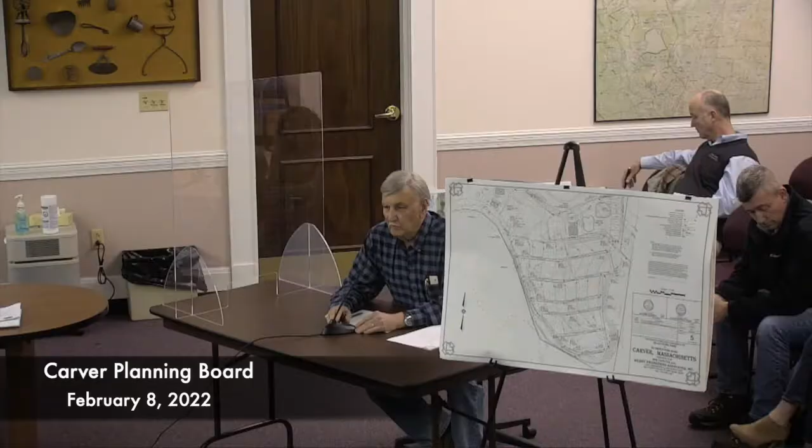Well, we did a couple of new sheets. First of all, I'm Dick De Benedictis from Plymouth, Mass, working with Webby Engineering and Northgate Resorts, trying to get this Jellystone Park improvements completed. The plan you see now has 3 sheets, having to do with the hydrants that we added. We promised we would add hydrants, so we've added, I believe, 11 — 5 in one area, 6 in another. Also, we have a detail sheet showing the hydrants.

So Andy hasn't seen these except on the internet, probably today when I sent it to him. And we also have the water gates, or water shutoffs, that we talked about in the last hearing on those 3 sheets. So those are in addition to the sheets on the other side of this board here. Let's see what Tom can do over here.

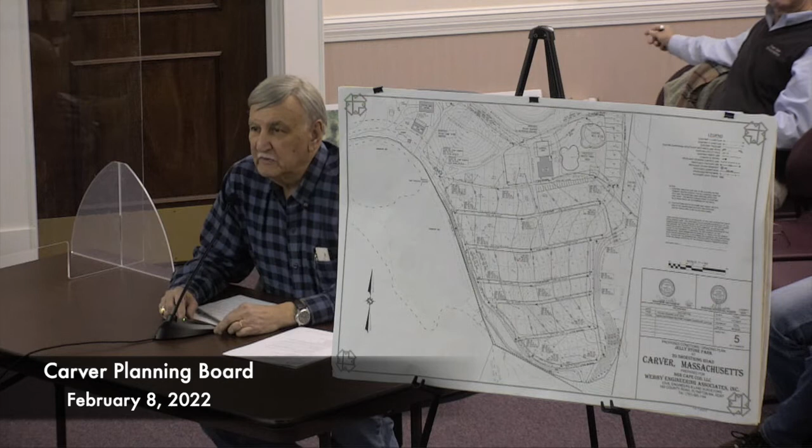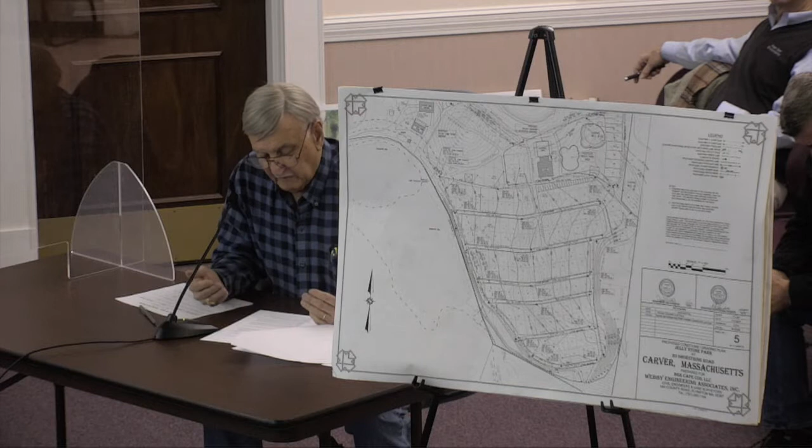I also took some time today to respond to a lot of the comments that Andy made the other day, and just go over them. I've sent them as email to, I believe, Tom, Andrew, and Bruce, but I didn't have the other emails. I do have hard copies here if anybody wants to look at them — only 3, but we can go over them if you'd like. Basically, a number of these are comments Andrew made that we totally agree with, and we've talked about them over the last few weeks.

So if I may, we made copies of your responses for the board. Oh, you did? We also scanned them and put them on the screen. Okay, we've advanced some since Kingston, huh? They have electricity here.

Tom and I have been involved for many years when we were both in Kingston on major projects. This is your one chance to tell people they made a terrible mistake leaving them in the building, but after that, you've got to just work with me, okay?

Well, it's really up to the board. Would we like to go over Andrew's comments? I have my copy here, I don't know if you have a copy, and we can go off the screen that Tom has over there.

The first page is just the number of items we've provided to the board, so they're not really comments as such. The second page deals with the zoning bylaws. The first item was definitions, and it says the existing and proposed project site meets the definition of commercial recreational campground with components of a commercial recreation outdoors use.

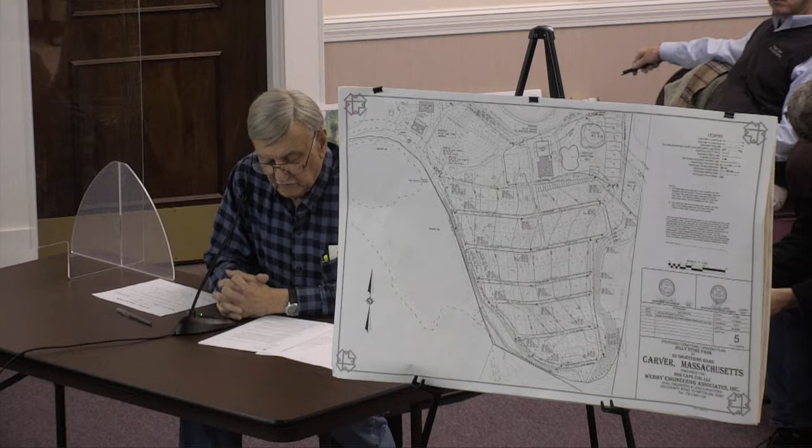As far as the principal use, it's a recreational campground, and it's permitted under the planning board under section 5300. It should be noted that commercial recreational campground is an existing use, and the proposed campsite expansion, building construction, and additions are consistent with the existing use.

Everybody in this room knows it was Shady Acres for some 40 years, and this is just an upgrade of a campground that was well known and well liked. It had septic systems and wells that didn't necessarily meet all of today's regulations, but they performed well for years. We're going to be adding 3 to 5 new wells of low yield, but they'll provide a definite centralized water system. So we agree - I put agreed, but it's basically obvious.

We were asked to provide some elevations of the proposed buildings, and I believe the client was represented by Mr. Rob Kraus, sitting behind me here. I believe they provided some, maybe all - were they all provided? Yes, I believe they were all provided. And provide the zoning table from the zoning bylaws - well, I'm not sure whether we put that into our engineering report or not.

The planning board, next section 2330, shall include findings for the section within the decision letter. Andrew says Fuss and O'Neill does not have any concerns with the building placement in regards to causing danger from fire. However, Fuss and O'Neill defers to the building official to make a final determination, and we agree with that. Fuss and O'Neill does not have any concerns with the emergency access, but defers to the fire department, which would be proper, and we agree.

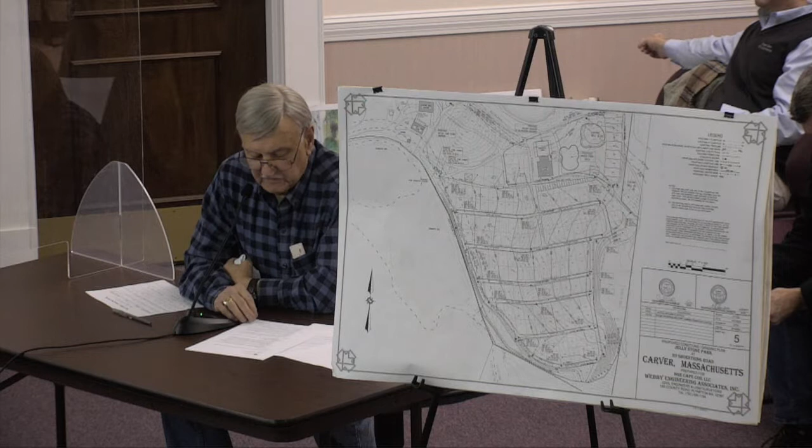We're increasing the power input into the park to 3-phase from what is now 1-phase, and all the sites will have at least a 50 amp basis. They'll be feeding each campsite with panels, so someone using a campsite will have an actual panel to hook into, just like for water and sewer. That's the key to the whole thing—this is not going to be haphazard, where you have to go find the electric, water, sewer, or a dump site. There's going to be a sewerage system that goes to a wastewater treatment plant, which will be very sophisticated.

So the utility poles will be something we'll have to work out once we get the final engineering between the electric company and Eversource.

We had an original item in the bylaws about measuring every 10-inch caliper tree or better, but that isn't really the mode of how we're operating. We're basically planting a lot of trees, since we've cleared out the minor trees and tried to flatten out the site so we don't have erosion on the roadways. So that's already in the plan.

I should say, if you want to stop me on anything here and ask me a question, please do.

I had a parking question that goes back to the one before. I know you don't plan on opening the water park to the public, but the ice cream store—do you have adequate parking for that, and will that be marked? That's probably going to be open to the public, right? Yes, there's a parking space just west of the miniature golf and the ice cream store, and we can mark those out. Right now there's like some railroad ties out there.

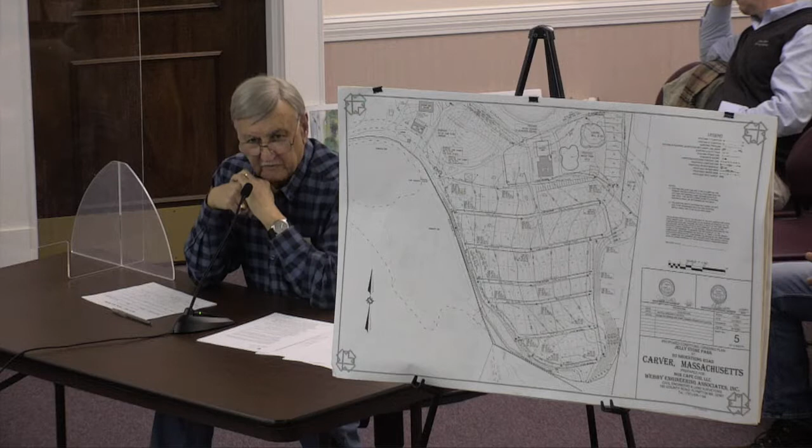I'll leave that to Rob to answer. I think for the most part, it's for the people's campground. I don't know how many people would come off the street to go to the ice cream shop.

And the same with the mini golf you have there? Yeah, the mini golf's part of the package—we don't charge for it. It's more for the people at the campground. Unless you were a camper there, you probably wouldn't know it was there, even in the past. Are you considering having the ice cream shop open to the public, though?

I'm not sure what operations is thinking about that. There might have been some discussion, but I don't think that's a steadfast thing they want to do. Is that something you wouldn't want to see? No, I just want to make sure you had adequate parking for it.

Yeah, there's probably about 10 spaces on that left side, the westerly side. Plus beyond that, there's a big open area going towards where the RVs are parked. That whole area has been opened up so you could have parking. Right now the construction equipment is staged there.

Yeah, I recall seeing that, and there's sidewalk and quite a few vehicles, construction. I'm sure we could probably put 25 to 30 parking spots in that whole area. Sure, okay.

If you are going to open that to the public, the ice cream, I recommend dedicating the parking spaces as required. I don't think it's very big, but I think a couple parking spaces will need to be dedicated to the ice cream place.

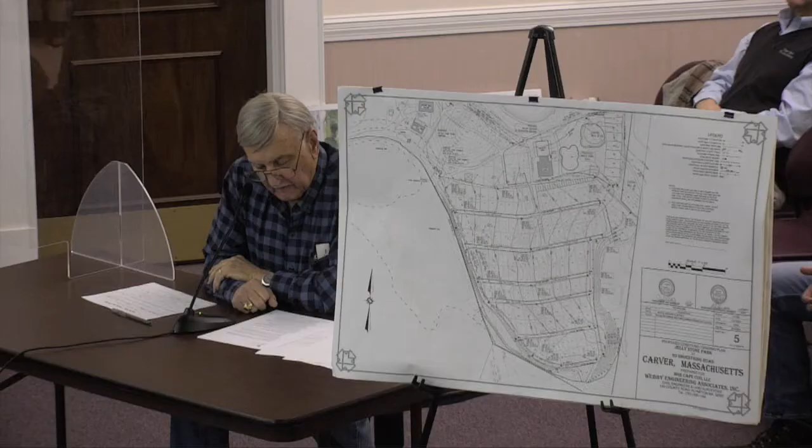Okay, if we go on to the water park, which there's been some talk about, that's now on the plan in that space we showed you originally. The water park won't be constructed until Phase 2, which is next year after this phase has gone through its season.

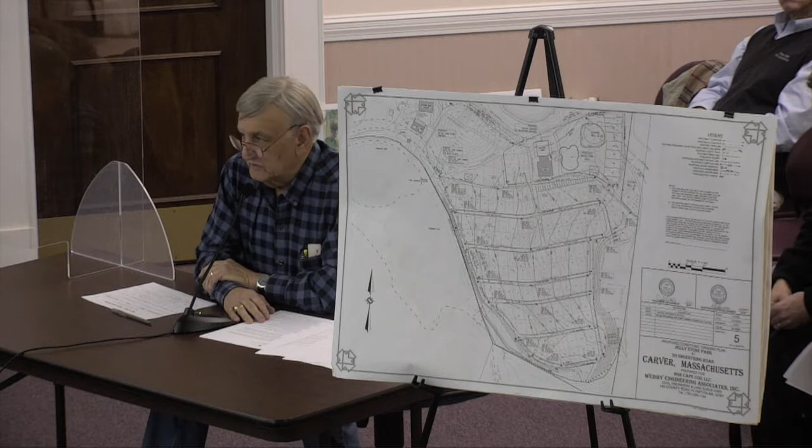Okay, operation hours, I think that's a valid thing to discuss, and that could easily be negotiated, I'm sure. I assume that'll be park people, so there'll probably be hours of recreation, noise, whatever, for the whole park.

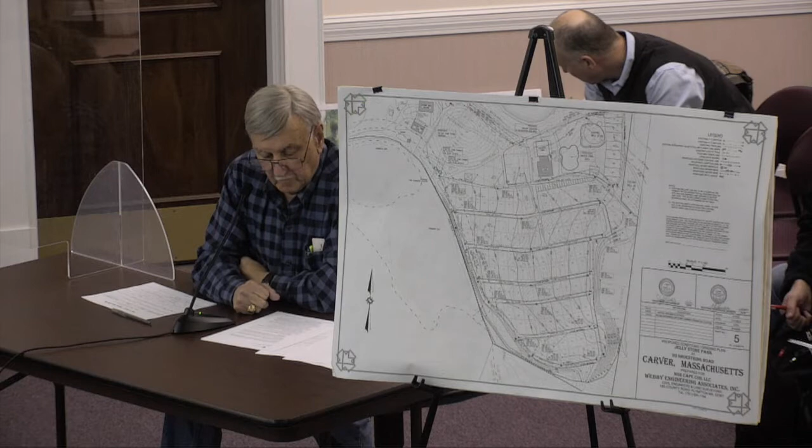We don't put lights in for swimming pools or anything like that. Most of the pools we have are closed down by 8 to 9 o'clock, so we don't encourage anybody to stay out there when it's dark anyway.

Could you be more specific on what hours you were looking for the water park? I don't know the exact hours right now. All right.

Now, the next has to do with lighting, and I don't think we've given this a lot of thought yet. I think we want to see what the place looks like once the poles are up, once the additional buildings are up, and where it's going to need lighting. We can guess and do all kinds of studies, but again, we're in a campground, not a shopping center, so you don't have to light the whole place.

It's just a matter of lighting accessible places that you'd be walking to at night. So I don't think we've firmed that up yet, unless Rob has something on that. Obviously we'll work with Fuss and O'Neill when we determine that situation.

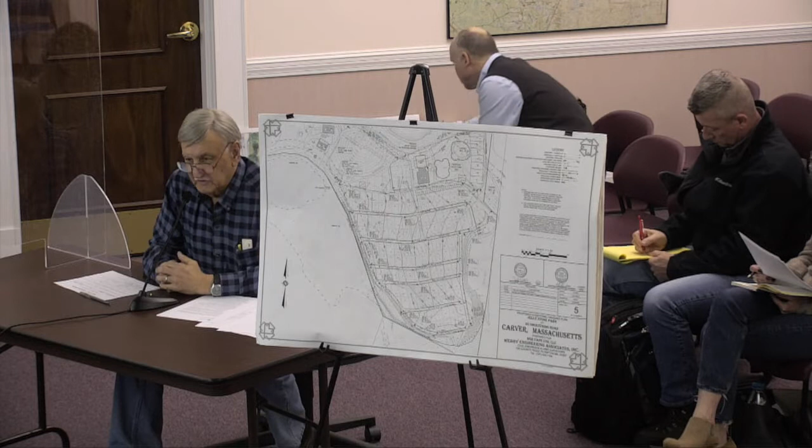Fuss and O'Neill is recommending that be a condition, which I think is proper, because that's something you have to look at down the line once you see everything in its place. Again, a shopping center is different—you're trying to see how much light you need to light up the whole place.

And what kind of heights were we looking at for the lights? Well, they're going to be probably building mounted lights. We don't really have ideas for pole mounted lights, but if we do, they're probably going to be like 10-foot poles, where we've done in the past. What's our maximum, 18 feet? It's 20 for parking lot pole mounted, and then 16 for building mounted or wall pack. Thank you, Andy.

And of course, in a campground, you don't want a lot of light. The whole ambiance of a campground is to have darkened areas and not feel like you're in the city. So I don't think that'll be an enthusiastic part of the design.

So the lighting we're discussing here is for the parking lot specifically? There'll be some lighting for the parking lot, but I think primarily what Andrew was looking at was the buildings being expanded, some with laundry, and there's a shower room in one end—it's on the plan—just lighting for people to know where they're going, to have access to the facilities.

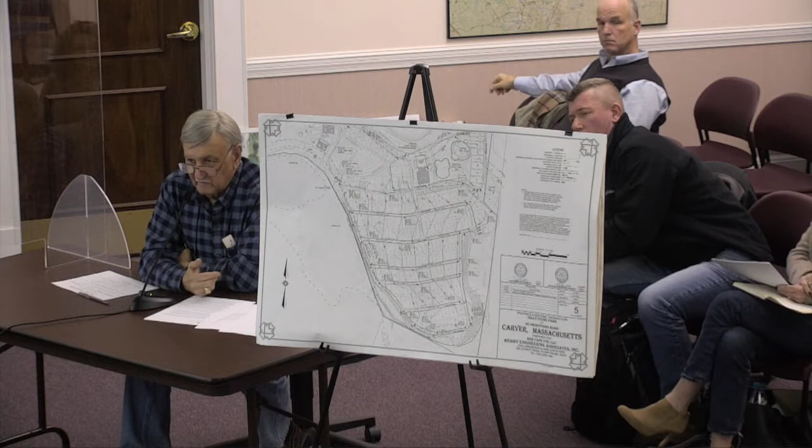You can slide that over a little so you don't hurt yourself trying to look around. The plan is to, and did you introduce yourself? If you could use this microphone, please.

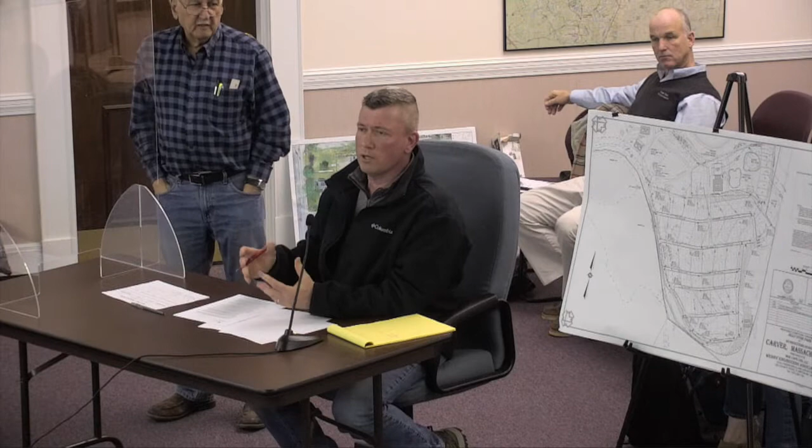Rob Kraus with Northgate Resorts. So as far as the buildings, they will have all egress lighting at the pathways going out, and the buildings will be lit up around there in the general area so people can get their way to the buildings. That's typically what we do at our campgrounds.

As far as the general area of the campsites, we don't put too much lighting in there. That's the camper's job. There's enough campfires and people's got lanterns hanging out and stuff like that. But yes, the buildings will all have the egress lighting, wall packs at all the exits, and any pathway lighting between the buildings that we need.

Okay, where are we? We passed lighting, number 8. Okay, Mass DEP is in the process of... could you pull the microphone towards you? I'm sorry to keep reminding you, it's just that we're a lot louder.

Okay, Mass DEP is in the process. It's basically a 4-step process. They have to approve the leaching area, which is a pretty good size because it's taking 30,000 gallons a day. We upped that from a previous number by recalculating how this really is going to work. So it's a 30,000 gallon treatment plant, taking what is an average of 15,000 gallons a day in water supply. That goes back to a metering situation on what was used last year, and that was extrapolated into what's going to be used in the future.

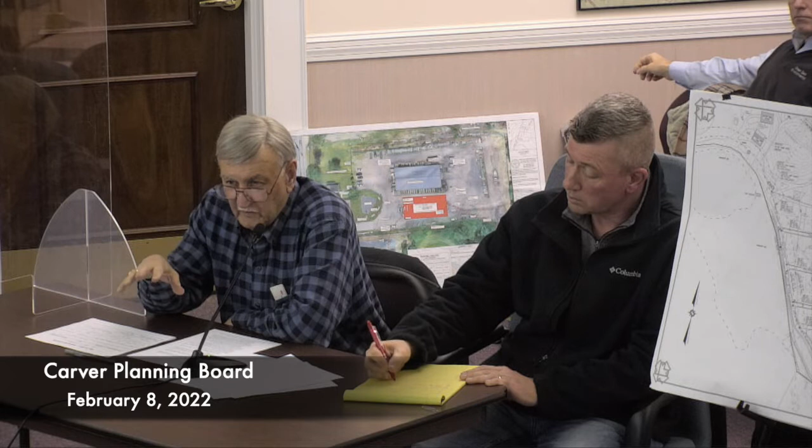Some of these units will be set up to demarcate the individual campsites, so maybe that kind of plant life would work in there. Are they relatively low growth? You're talking about a low growth plant, right? There's a lot of plants out there, different sizes.

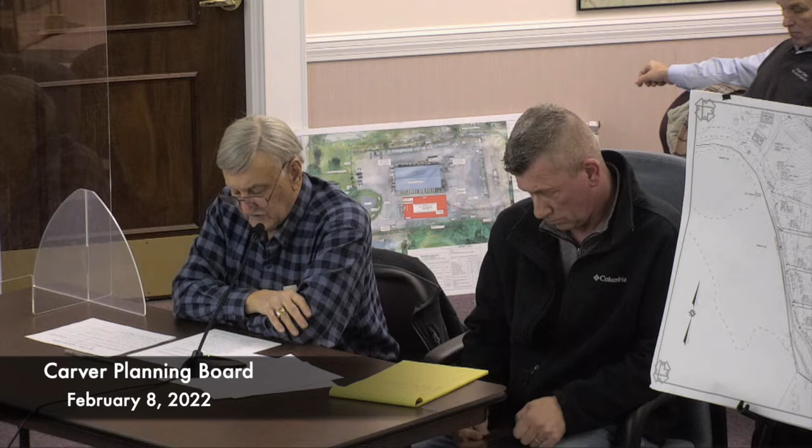Okay, and next, number 10, Mr. Glines said the applicant shall request a waiver for interior parking lot landscaping since a proposed row of parking exceeds 180 feet adjacent to the lodge. Now, we're talking about that as a waiver, and it basically has to do with dimensions here. But we agree with whatever Andrew is asking for, because it is kind of a unique situation, relative to how it compares to a subdivision or something like this. This is different. So whatever works, we'll ask for a waiver, and we'll try to produce whatever makes sense.

Okay, we're going to number 12.

Okay, this comes up every time you don't have a pavement, and of course we don't want to put in any pavement because we don't want impervious areas contributing to stormwater. So the question is, clarify how parking spaces will be delineated.

Well, you're not gonna have striping, but the other ways to do it is by post. You can number posts, you can demarcate the center of a car, or demarcate each width. I don't know what you've found successful in this kind of a situation.

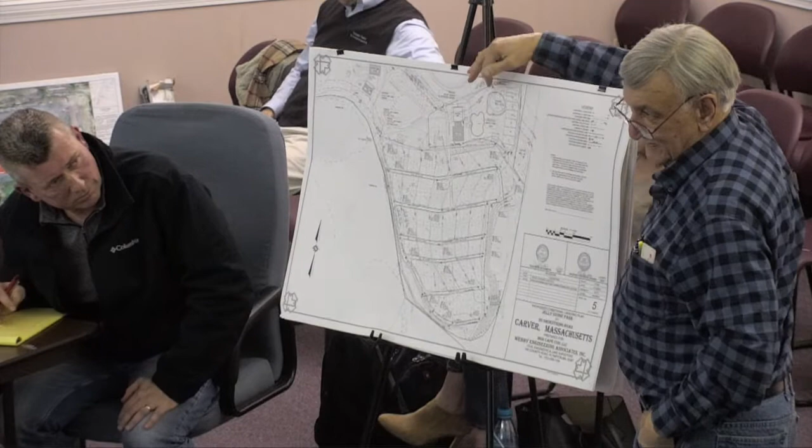Yeah, it's actually good. We're showing the configuration that the architect gave us. We're not showing all the apparatus that goes in there, the slides and various things you see at water parks. So it's this area here, and there's a pool over here. This is all phase one, the area that's been active this last season, that we're hoping to open this season.

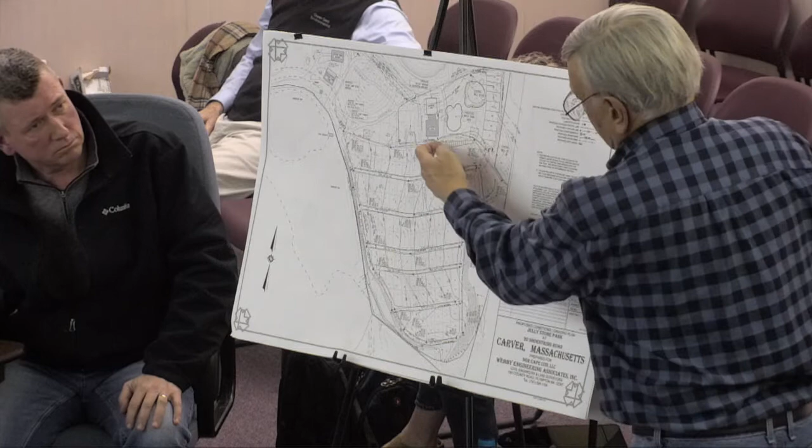For spring, we're talking about parking. We have a lot of parking designated across the street here. I think it might be noted to put some stops or plantings in between, so we don't have a stretch of... I think that would be a good location for wheel stops to prevent passenger vehicles from extending into the adjacent campsites, and also to delineate how far vehicles should pull in, to make sure the drive aisle is clear behind it, especially for emergency access around the lodge.

That is also the location where I wanted to clarify that the applicant will need a waiver for interior parking landscaping. There's a requirement for a landscape island for parking lots with over 10 spaces. For this, it's just one row of parking that's going to be surrounded by landscaping around the lodge as well as the campgrounds. Since it's not going to be a paved stretch, it doesn't really make sense to have a landscaped or delineated landscape island within that. It would really be gravel or crushed stone parking.

Okay, the next area had to do with loading spaces. The way I'm looking at it, and I might be wrong, Rob can address this, but I'm thinking the only loading area will be the maintenance garage, the garage doors. I don't think you're going to have a loading dock anywhere. No, there's no loading docks planned. So I'm just thinking the only place you'd have to have it is the maintenance building. Even deliveries to the store would probably just be dropped off there, since I believe they store everything in the maintenance building. Everything gets dropped at the front and gets dispersed within. So that's the answer to that issue.

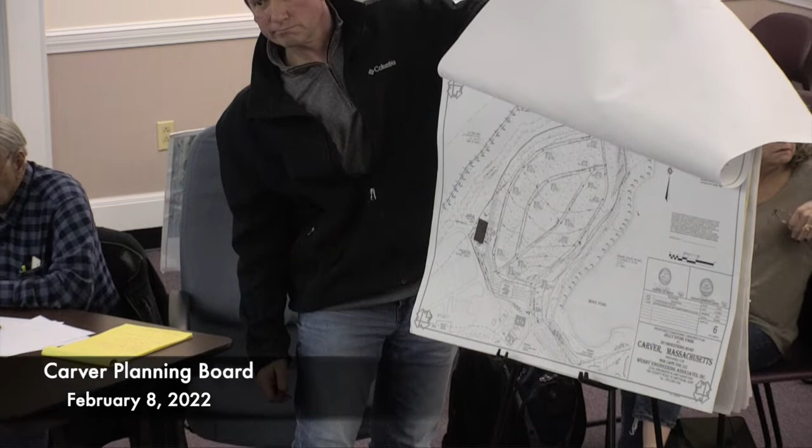And just to reiterate, the access roads are actually going to be crushed stone as well, not compacted gravel. It would actually be crushed stone, so you'd actually get infiltration in those roads as well. That was something I discussed with the applicant and their engineer during my initial site walk about a month ago.

And the last has to do with implementing what we were just talking about, the various drainage aspects. So that's kind of it. Obviously, we would like to be able to go forward without interruptions, since there's only about 6 weeks left to construct.

But it's up to the planning board whether we do that or not. Do you think you could modify the site plans to include all of the issues that were brought up by Mr. Glines before our next meeting? Yes, in fact, yeah, we can do that.

But what we don't want to do is interrupt the project the way it's going. If there's any way we can modify - and I'm just throwing this out, I'm not trying to be argumentative - if we could somehow approve the decision and approve the plan at the next meeting, so at least we have some momentum continuing the next 2 weeks to get this stuff in.

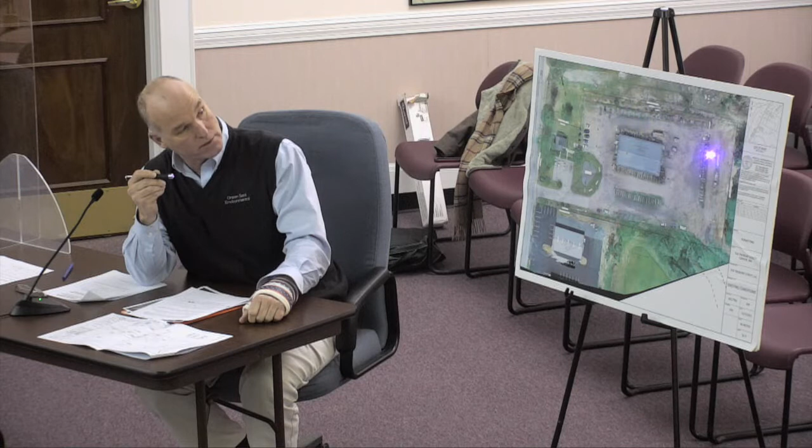This is in front of the Conservation Commission as we speak. The meetings may continue to the 16th.

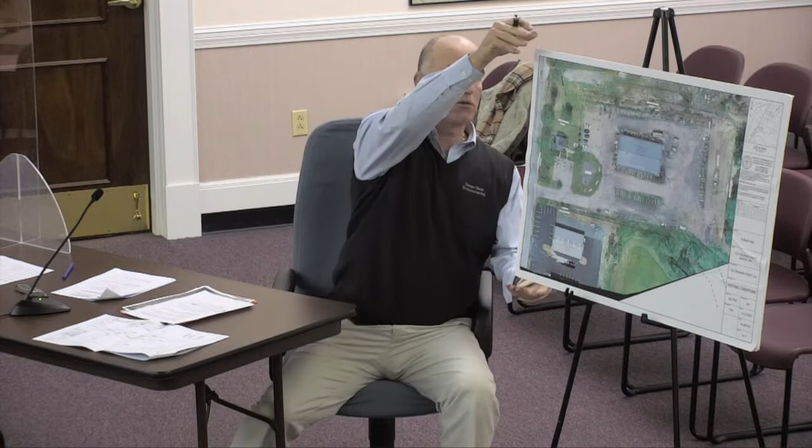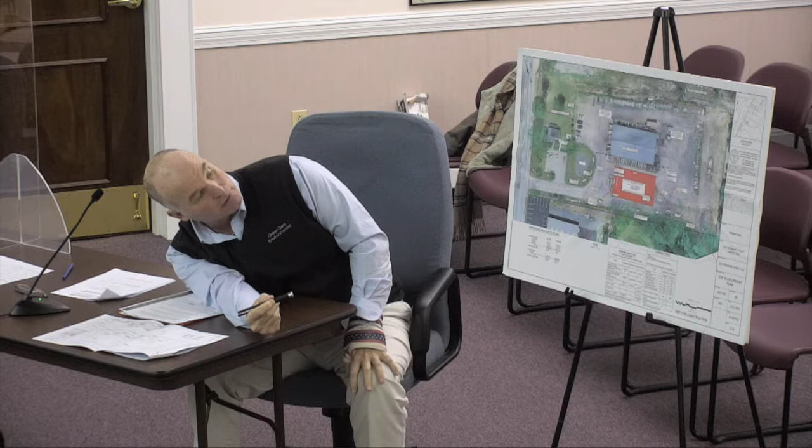What Mr. Ajami wants to do is construct an identical building, 7,320 square feet, directly across from his existing building. In front of this building, as I guess would be like a phase 2, he wants to put a showroom at some point to display his finished works. They manufacture in here, they have large cranes, they have a digital computer system which picks up the slabs, grinds them, and edges them. It's quite an operation in there.

But he doesn't have any storage in there, as you can tell - it's all over the site. So when he gets a finished product, a sink, a cabinet, a countertop, he has to store it outside or get it off site rapidly. So he wants to have some dry storage in this building, probably 2/3 of the building. All the manufacturing will continue to happen in the original building because to move that equipment would cost thousands and thousands of dollars.

Stormwater from this building will be directed back, piped, collected from the downspouts and directed back to this infiltration basin. It's quite good size, and the soils out there are all sands and good soils. The septic system is located in this area - he's proposing a couple bathrooms as part of the shop area or showroom area. So he's just going to stub it out now and install the septic tank, but have it capped for the future.

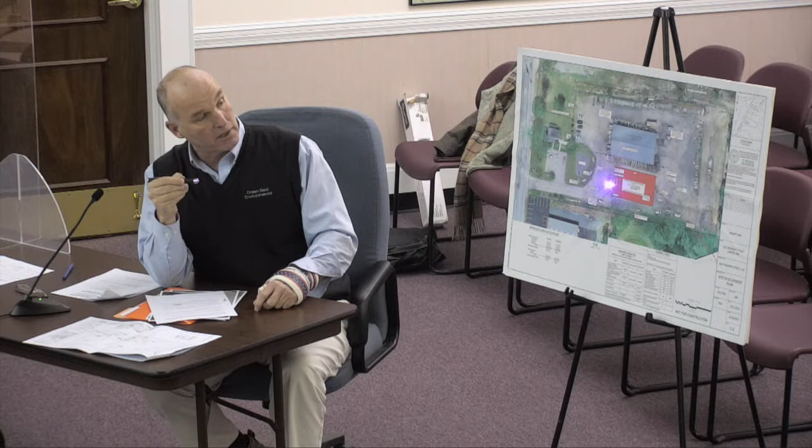The reason he wants to put it in now is because we're going to pave up to here, just so we can have ADA compliance, since the parking for the showroom will be right here. You have to give the shortest path for ADA accessibility.

Other than that, the bylaws allow this board, as the special permit granting authority, to issue a permit if you can meet these four criteria: social, economic, and community needs. We would submit to you that Timeless Stoneworks provides Carver and the surrounding communities with countertops needed for new construction and remodeling projects. Having this business in town allows local contractors a source for these materials for their projects.

It's a nice little business he's got there. He doesn't just do Carver, he goes all the way down the Cape. I've seen his trucks.

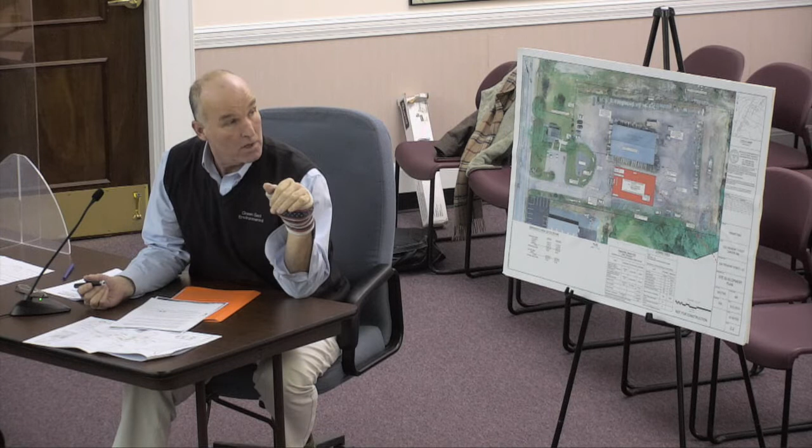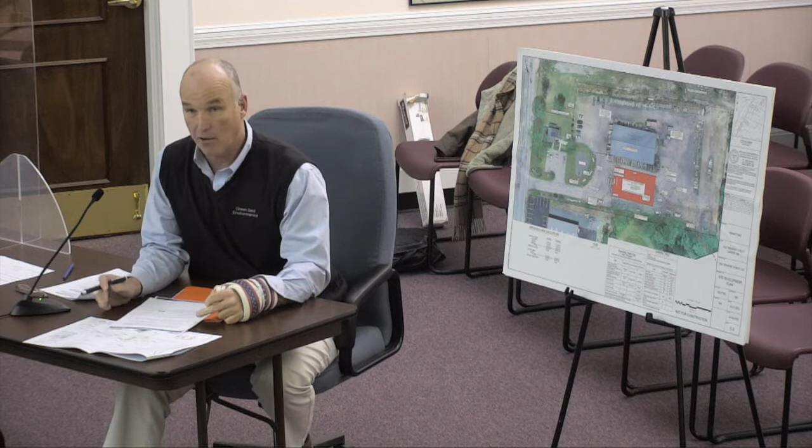5332 says traffic flows and safety. Again, the new building is not going to increase the number of people there. He'll probably get maybe a customer an hour on weekends, maybe 2 customers an hour when he has his showroom open. The rest of it's just dry storage. They're going to be moving slabs in and out via forklift. So there's not going to be much burden on traffic or safety or traffic flow. Everybody in the parking lot can turn around adequately and head out. Nobody's going to be backing out onto Route 58.

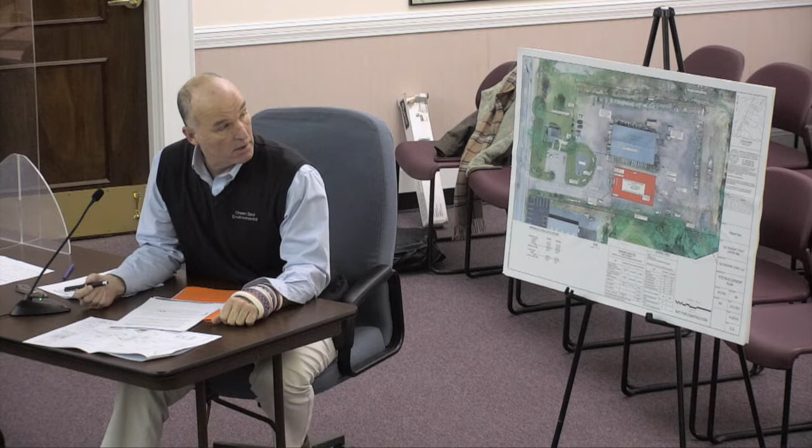5333 says adequacy of utilities and other public services. This lot is serviced by private septic and private well, so there's no burden on town systems there. Again, it's a commercial project, so there's no burden on schools, and the fire and police aspect of it are relatively the same.

The last 4th criteria is potential fiscal impact. As I say, this place has been here from 2008, and it's assessed at $744,000, and it generates about $20,000 a year for the town. With the new building, it'll probably go up another $500,000, which would be another $10,000 a year for the town. So that's about $30,000 a year for the town. This is zoned industrial. It's where the town wants the development. It's an industrial project with a little retail component, which is triggering the site plan review and the special permit, and that's why we're here tonight. I would be happy to answer any questions you or the public may have.

I was just looking at the plans this afternoon, and I see that part of the proposed building is in the 65-foot buffer to the BVW, and ordinarily I let conservation take care of that kind of stuff, but actually the building is sitting within that area. Is that something that you feel conservation's going to approve?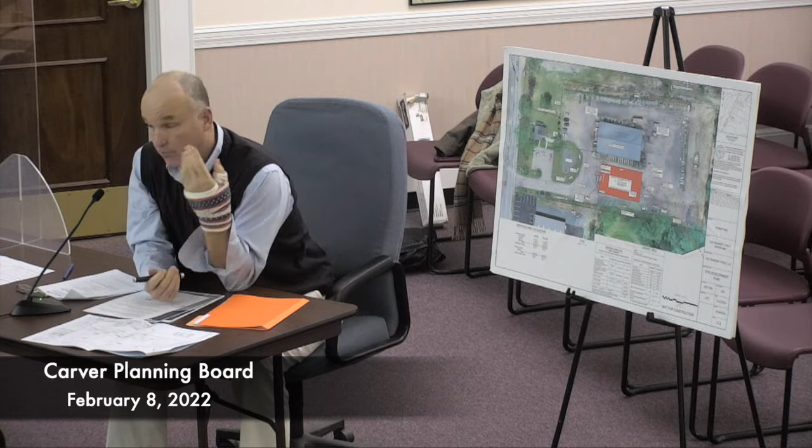So I squeeze it in the best I can. The conservation wanted me to put it out back here. But to do that, you really lose all your street presence, and there's no sense having a showroom if you can't even see the building. So that's the argument we're having with them, or discussion we're having with them. I don't believe that resource area is protecting the bog at all. We're taking all the water and collecting it off the roof and infiltrating it back here. And that's the only function that this 65-foot area is doing now, is infiltrating water. Again, there's no topsoil, there's no organic mat, there's no vegetation, there's nothing there to clean the stormwater.

So what if the conservation doesn't go along with this? What I'm thinking of is, generally we go out for a site walk, and I just like to see — I don't remember what the existing building looks like, I don't remember what the office looks like. Generally, I like to have an elevation of the building. I think, wasn't there one included, sir? I didn't see one, but they only gave maybe you a floor plan, that's.

Yeah, I thought it was 29 feet. Yeah, it's going to be very similar to the existing building. It's just, you know, like a steel metal building. Yeah, that'd be fine. I'd like to go out there and see what the existing building looks like, and then what this new building looks like, because we've been getting comments on past projects about what those look like, and we just want to make sure. Sure. Would you like me to attend that site walk with you guys?

Well, I'm wondering if this project would go ahead if Conservation says you can't put the building within that 65-foot buffer. Would you make the building 2 feet less wide, or?

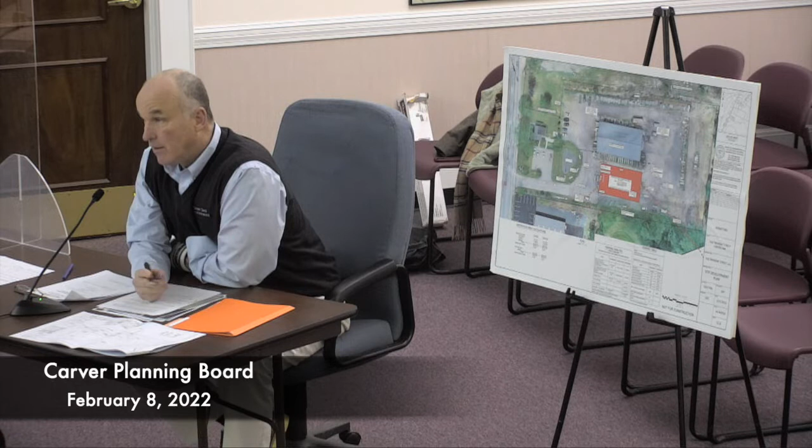I haven't broached that subject with them. At my first meeting, they asked me to talk with Mr. Jami about moving the building, and he brought up the storefront and street front presence that he wanted. The Conservation Commission also said you could put your showroom in the other building and put the other building out there. And he's like, I have $200,000 of equipment in there, it would put me out of business for a month to move all that stuff. So he's not willing to do that.

So I'm going to go back to the board and fall on my knees, do my begging and pleading, and hope for the best. If that doesn't happen, then yes, we're going to have to do something differently.

And you've got 20 feet between the buildings. I guess you'd have to talk to the fire department, but I imagine there's a minimum distance between buildings. Is it 20 feet? I don't know if there's a fire code for between buildings. I've seen them as close as 12 feet. You go into Boston, you see them 2 feet apart.

I wanted the 20 feet just for my own engineering, it just makes good engineering sense. You want to be able to get up and down that middle row with an 8-foot wide fire truck if you had to. Not that they're ever going to fight a fire from the middle, they're always going to go around the outside. But there's no hydrants or water out here anyway, so they're going to have to bring their own water.

Generally on something like this, I'd like to see the building corners staked out, and then we could take a look at the type of buildings that already exist out there. Is that prior to the site visit stakeout? Yes, prior to that. So when we schedule our site visit to go out there, generally we go over with the engineer or the owner of the property to show us the location of the building and to see what's out there.

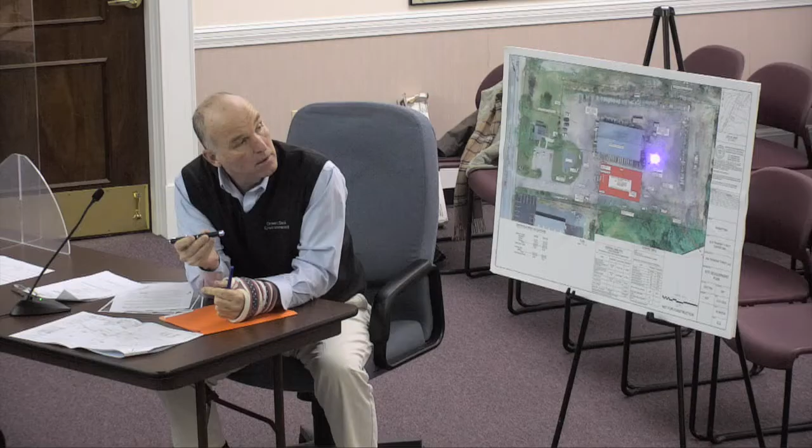And you would be concerned at this point about your street presence with it set that far back? The thing is, if they wanted us to tuck it back behind this building... well, I see their point, because it's a very big lot, and that's well out of the wetland zone, because you're going to have to deal with runoff, and you've got delivery issues within the 100-foot, and a lot of trenching to be done.

Has there been prior approval through Concom for the work already done within the 65 and 100-foot? I went to the registry of deeds today and looked for anything, and I couldn't find anything. The lot was developed — I went back on Google Earth, and the first development I saw was 2003. Mr. Jami acquired this in 2008. So I don't know if they didn't record it, or I don't know how it was developed.

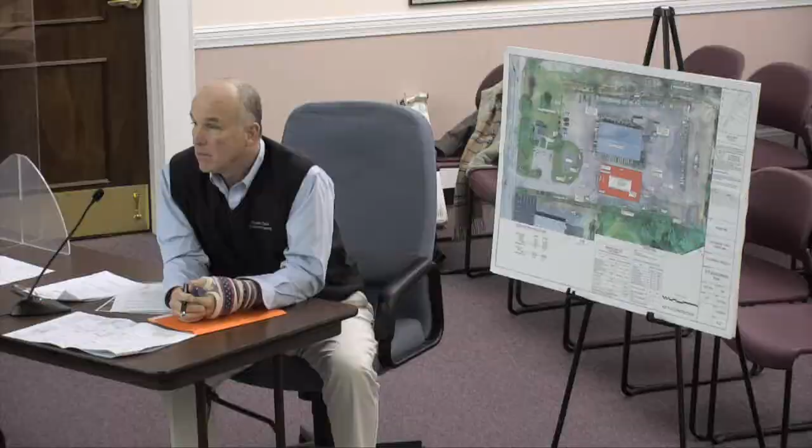All right, all we can go with is what he has drawn. I can understand what you're saying — you don't want to put a showroom in back of a building that's already there, and you'd rather have the showroom, and probably a sign, showing that that's where the products are going to be displayed, and you want to see the building from the street. What Conservation does with this, that's their decision, but I don't know, we could look at it — does Tom, or?

Yeah, a couple questions. And nice to see you again, Stuart. You're taller off of Zoom.

So we talked about earlier, what's the actual size of the building? Because one site plan said 7320 and the special permit said 7230. It's 7320, 122 by 60. And because it's an engineered building, making it 2 feet smaller isn't a very good option?

Excuse me, the contractor, Roger, I forget what his company is, from Cape Wide. He's the one who put up the first building, and he wanted to put up exactly the same building. I don't know if they come in 2-foot or 4-foot increments, that's a bit out of my knowledge base. If his use is simply for storage, he'd lose a couple feet of storage, but it's not like he has to fit working equipment into the structure.

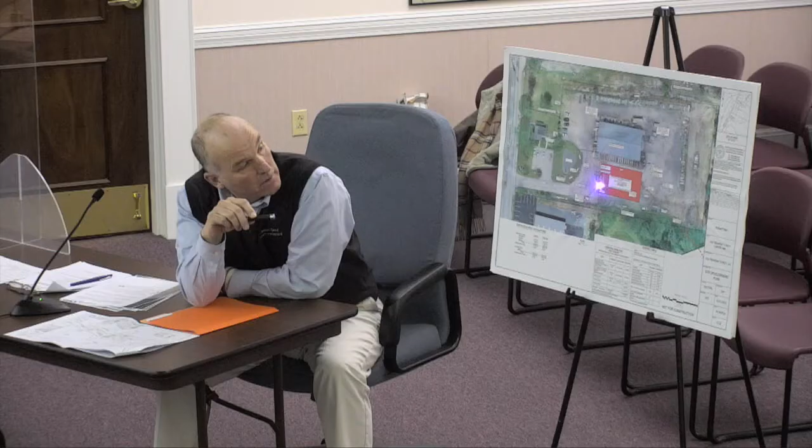Now, there's a 10-foot screening requirement for the building. Do you see that fitting in here? I have landscaping out front in this area. Down this area, I didn't put any screening. We have natural screening on the side property line, which is over 10 feet. But there's no residential around here, this is all commercial and cranberry bogs.

Now you're asking for a rather large reduction in the parking spaces also, I understand? Yeah, if you will, can I approach? I'm just gonna show you a couple pictures inside the building. It's really full in there, and they don't have a lot of employees because the equipment's so big, so I think they have about 10 to 12 employees there. So we were looking for a reduction in parking. There is other opportunities to park on the site because it's so large and gravel.

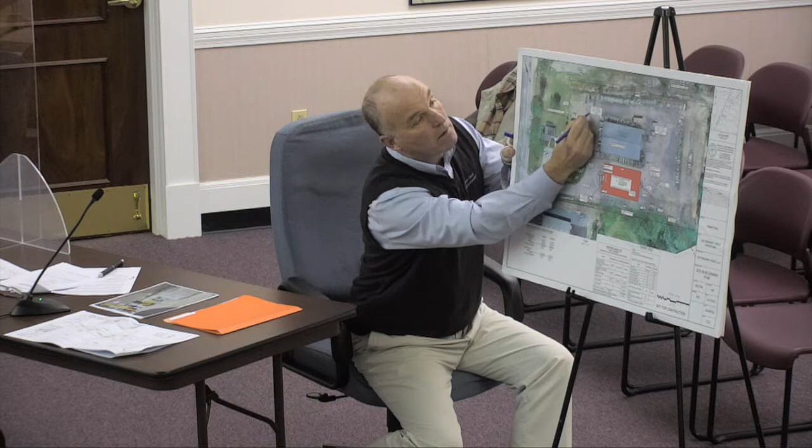And I was thinking, as we sat here tonight, this area here could almost be some parking over here, if I could get a 24-foot drive aisle right there and coming out of here. Are those parking spaces delineated? They are not on this map. I can put those on the plan, sir. Are they in physical real form? No, it's all gravel there. They typically just park around the edge, when I went there the other day.

One of the things we have to concern ourselves with, especially with buildings of this size, is somewhere down the line, hopefully it's super successful and runs through to eternity, but at some point this building might be closed or switch owners, and then you're looking at a lot of issues. Mr. Shea, I would say that even if it changed hands, they're gonna have to come back in front of this board for a special permit anyway, and as such, they're gonna have to do the parking density based on their use. There's plenty of room on the site for parking.

Right, I understand he doesn't have a lot of foot traffic in regards to this, and that also raises the question of, at 200-plus feet setback, why there's a big concern about street frontage. I think you'll see, Mr. Shea, when we get out there on the site, if you stand at the entrance you cannot see back here, but you can see that's where that building would be. Right, I'm familiar with it, and going by at the 35-mile-an-hour speed limit, all you're gonna see is the front building, the existing office space, and maybe whatever they have out there for display.

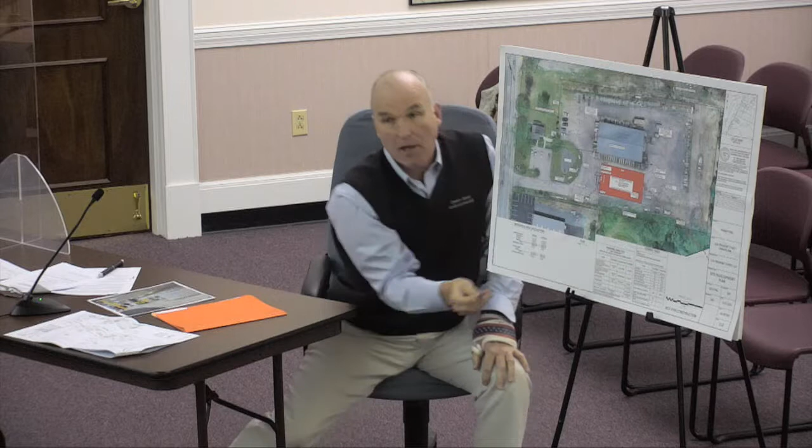So if I come out another 10 feet as a mitigation measure? Yeah, because it's 30 feet right now. I'd like to keep it 20 so you can get a drive lane down there.

So if you mirror the 20-foot width, ultimately you'd need Jesse Boyle's approval for the access around that. I think that's reasonable based on what the town has prepared or approved before.

Increasing the landscape buffer and maybe even adding a grass channel along that property line would alleviate my concerns with the encroachment. I can't say it would alleviate their concerns, but I think it's a good strategy to look at.

Is there a reason why the showroom couldn't be added to the existing office space out front? It's just too small, it's an old house, somebody renovated it, it's all cut up and wood framed. The owner doesn't want to do any addition onto the front office space - he hasn't indicated that. This is what he wanted me to put in front of the board.

I haven't looked at the stormwater design yet, but it doesn't seem like you're expanding the existing basins. But you've assessed those and they can accommodate the additional impervious area? Right. What I was doing was going to lower this lip over here because the water in this area...

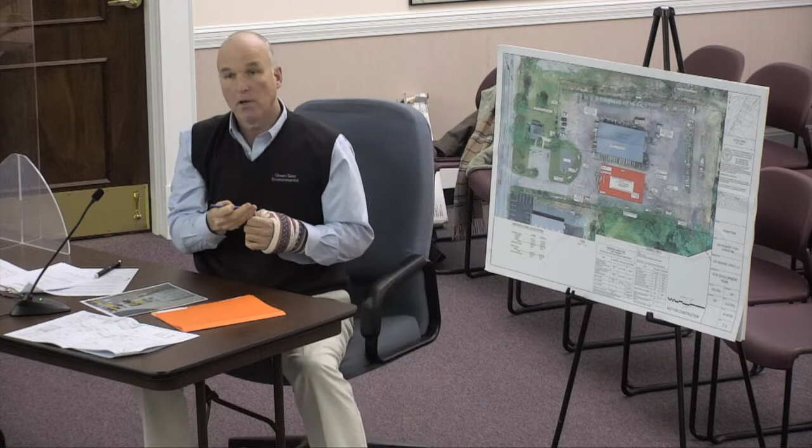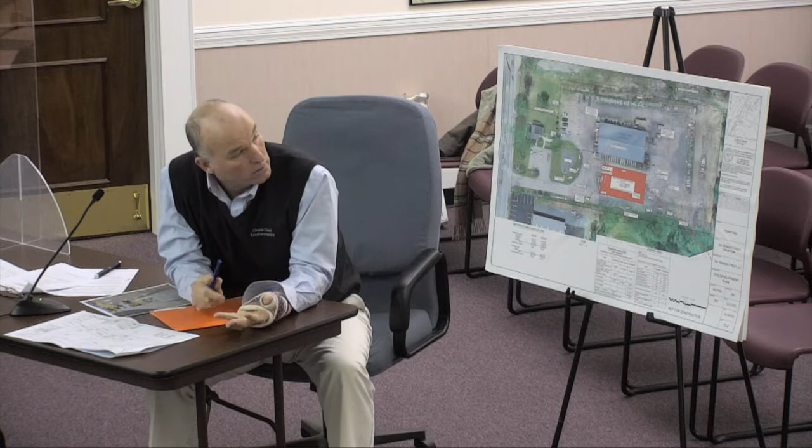I ran the HydroCAD calcs and everything worked up to the 100-year storm, but I didn't have real good detail on the aerial - we drone flighted this - and didn't have a lot of detail down in this corner of edge of bank or top of swale. So it worked during the 2, 10, and 25, but the 100-year was pretty much bank full.

And you're going to be asphalting in front of the showroom? Yeah, I have to do that for ADA compliance.

I also have a question as far as the building is concerned. I'd like to see some kind of architectural rendering on the front, especially where it's going to be a showroom. I don't necessarily want it to be exactly the same building as the other one because we've had some problems in town where they just look like boxes.

I would think that if it does go through with Concom and you do put the building in this space, it should be presentable on the front, like a step-out roof or something a little different - windows, doors, break up something a bit different than the front of the other building. Understood.

With the asphalt paved area on the front of the building, I see you're calling out a paved waterway as well as a crushed stone diaphragm. Is the intent for that crushed stone diaphragm to extend around that entire perimeter abutting the...

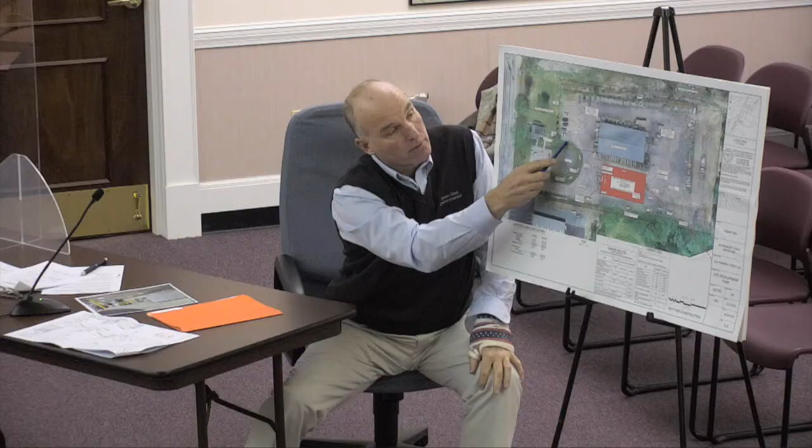All the way, yeah, I was going to run it all the way around, because there's nothing there right now, and I just thought that would be a good feature to remove any of the total suspended solids before it hit the grass filter strip.

I guess I'd actually prefer to see an increase in the width of the filter strip as opposed to the crushed stone diaphragm. If you don't need that full radius, I think you have enough room to get the 24-foot wide drive aisle behind the proposed parking spaces.

Right, that's one of the reasons I set that building back a little bit - you wanted them face to face, but I couldn't make it work. Long-term maintenance with those stone diaphragms is always a concern. Understood - rather see grass than stone.

Yeah, and I think the filter strip - really the width of the filter strip per the stormwater handbook - I think you'd be able to accommodate it there based on the length of impervious area that would be directed at that area.

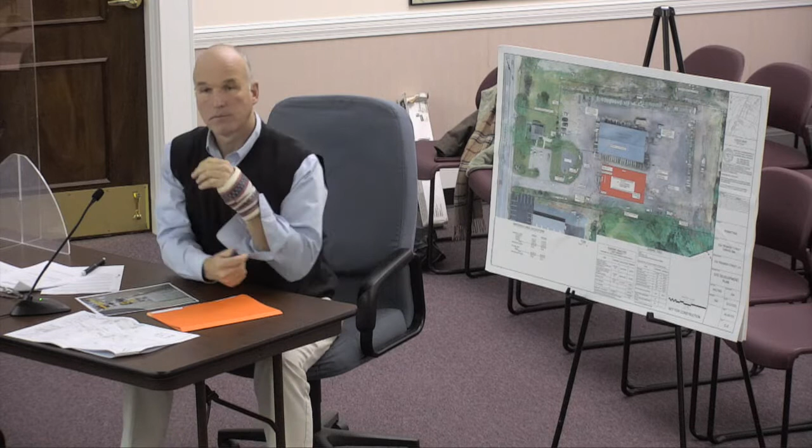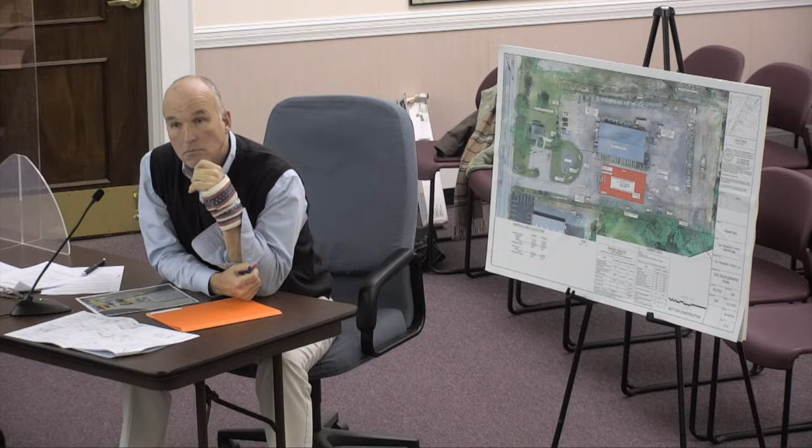I'm not saying the project wouldn't be approved with a crushed stone diaphragm, but I guess just take a look at using a filter strip and upgrading that instead of the stone diaphragm.

And what's it, 25 feet, right? It's actually depending on the length of pavement you have - it could be less, and the slope of the pavement. So if it's less than 2%, which it is, and under 75 feet, then I think a 10-foot filter strip meets the stormwater handbook requirements. So that would definitely work then - I'll take a look at that. Thank you.

Will there be a traffic stop in regards to the infiltration basin in front of the stores? Will there be a what, sir? Some sort of traffic stop or curbing?

Along here? Yes, oh, there's boulders out there now, but they're probably 15 feet on center - if I was looking at 20 feet.

All right, any other questions? We'll have another look at this. We'll do a site walk, if everybody thinks that's what they would like to do - a site walk at first.

Question, Mr. Chair? Yes, you wanted the corners of the building staked prior to the site walk? Yeah, or marked, painted, just so we could see them out in the field, the corners of the building. Definitely.

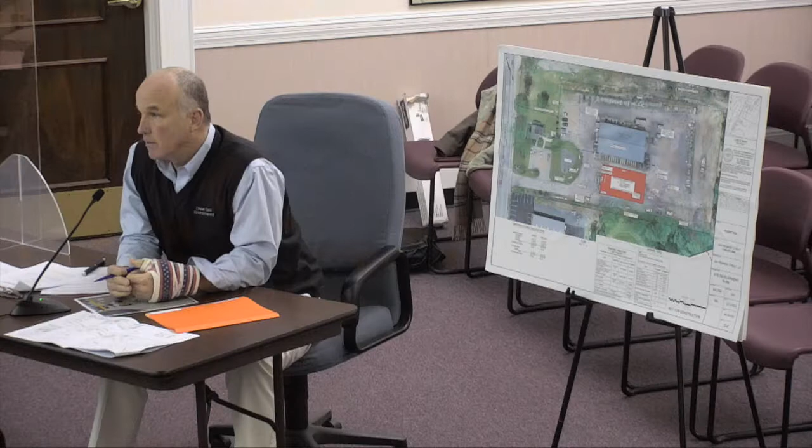While we're there, it's literally another half hour, we could get that done. Just paint, we'll probably paint right on top of the gravel - that's fine. So what's the time frame for getting that done?

So the board can sort of plan the site visit - I guess it's weather dependent. Hopefully we could get some snow melt here over the next couple days, so I probably could get it done early next week, barring a snowstorm.

Do you want to just let me know when it's set, and I'll communicate with the board about setting up the site visit? That would be perfect. If that works for you, we could do that. Yeah, that'd be perfect.

We've been doing it at noon time, and I don't know if there's any day the members can't do that. Is there a day you can't do it? No, I'm available anytime at noon. Rich is usually available pretty much any day, usually not Wednesdays. I'm very tied up till 1 o'clock on Wednesdays. So any day except Wednesday.

Just let me know next week when you have it done, give Tom the town planner a call, and he can email us, and we'll go out and take a look at it.

It does depend on the weather. Hopefully we won't get any more big storms like we had - but it's harder to put the stakes in the ground when you have 2 or 3 feet of snow, the beam poles anyway. I was thinking more of painting the two dimension lines, the buffer lines.